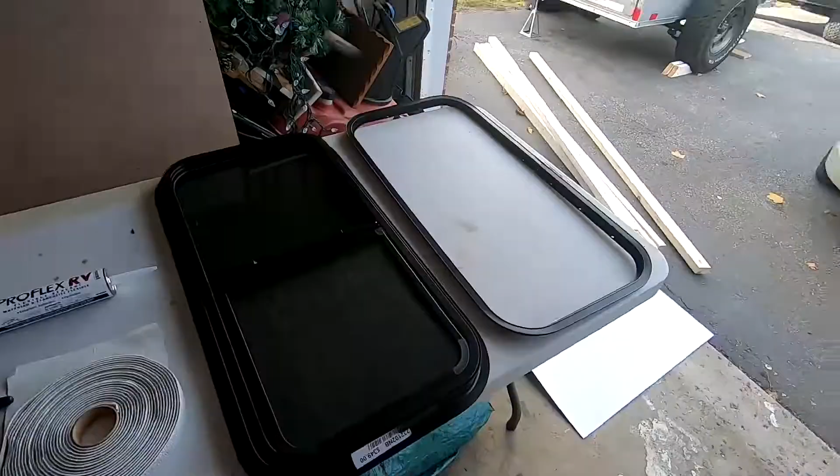Installing the RV window. This is a 30 by 15. All the trailer stores and parts warehouses and manufacturers around here, this is the standard size. I couldn't really find anything else. Ideally, I wanted to do 2 smaller windows, but I just decided to opt for the convenience of being able to pick up the window myself and not have to wait for shipping.

The way this works is similar to the roof vent. We're gonna have to drill a hole into the wall, mark it out and everything. I'm gonna measure off of the interior frame, and essentially what happens is that I'll have to get someone to hold the outside, and then I will be inside with the frame, line it up, and then sort of sandwich the 2 pieces together. I'm gonna be using some 2x3s as the frame. That should give me the right thickness and offset.

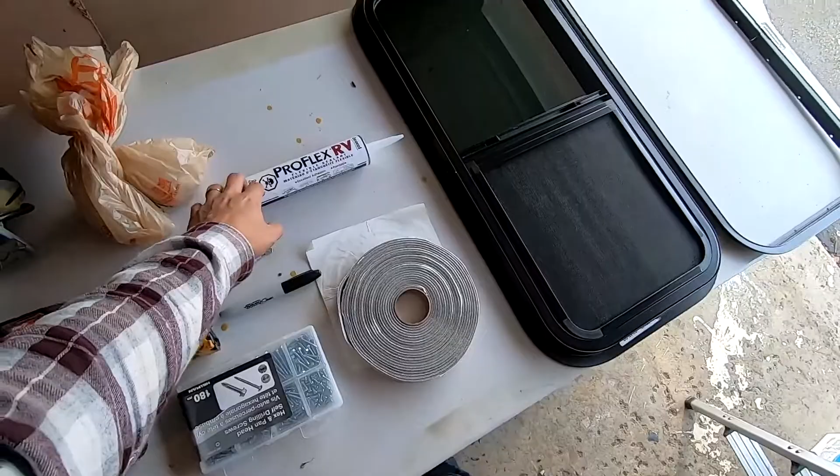Got some butyl tape, some clear RV sealant that I'll be using afterwards once it's all on the exterior perimeter. Some self-tappers, impact drill with 2 drill bits, and then my jigsaw. So the first thing I'm going to do is use some old Bristol board I had left over, and I'm just going to make a template using the interior trim, and I'm going to trace the outside edge of the trim, and then that way I'm going to be able to transfer it to the trailer and make sure that I'm cutting the right hole in the right location.

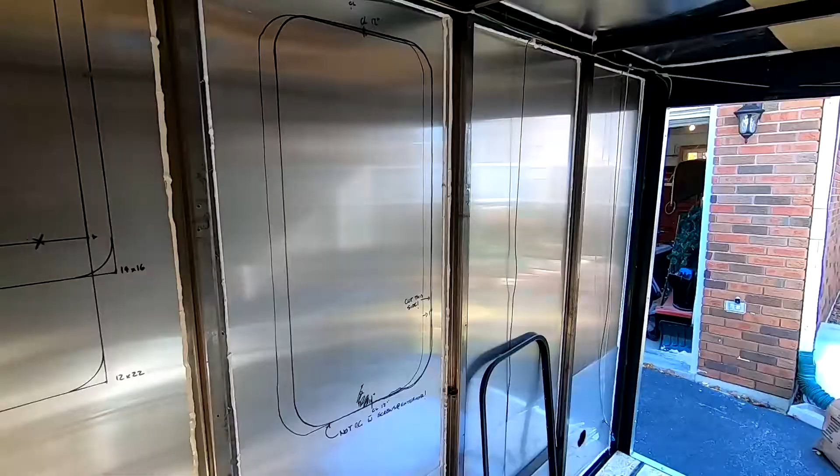Okay, so I've been having much debates with windows. As you can see, I've been sketching a lot of them out. This was the original window size I wanted to get, but unfortunately I wasn't able to find any, so I'm going with a larger vertical window.

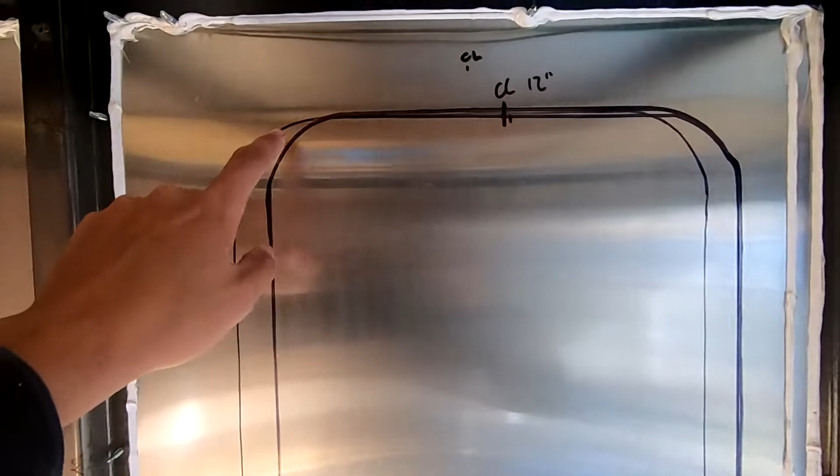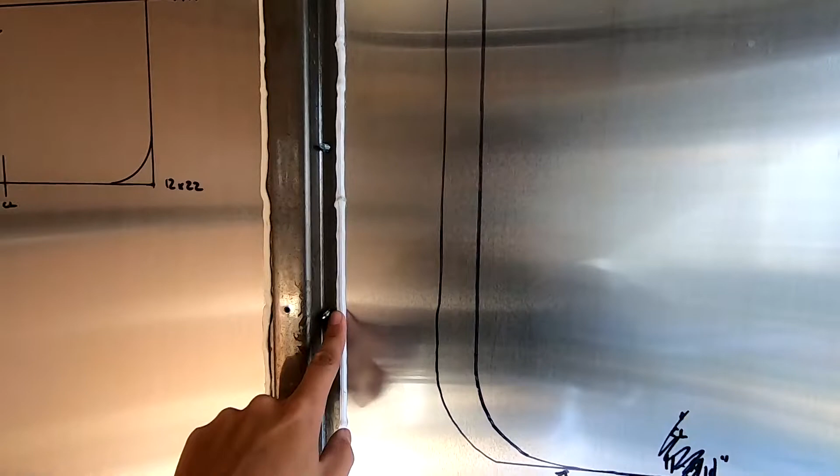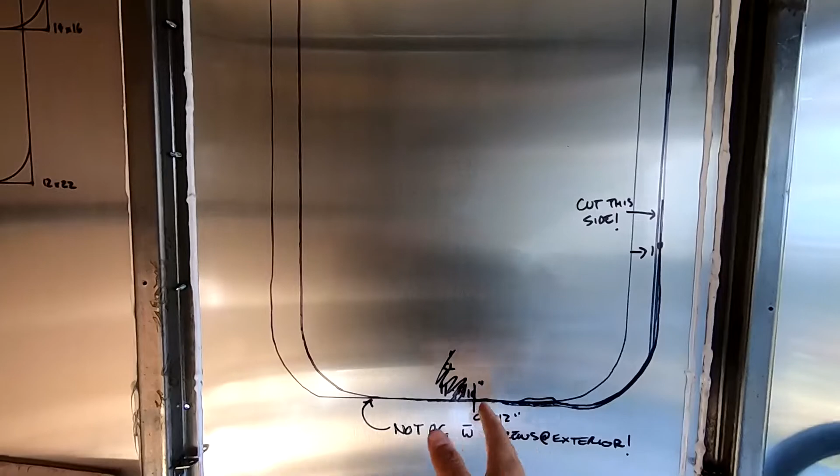Okay, so originally I traced out the center line of the window between the 2 studs, and I was just about to drill the holes, but then I kind of thought, okay, the screws for the panels on the exterior, you know, they got set here on the side of the stud, and then again on the outside edge of the stud. So even though it might be centered between the studs here, it wouldn't be centered with the screw heads on the exterior. So I moved it an inch towards the right here.

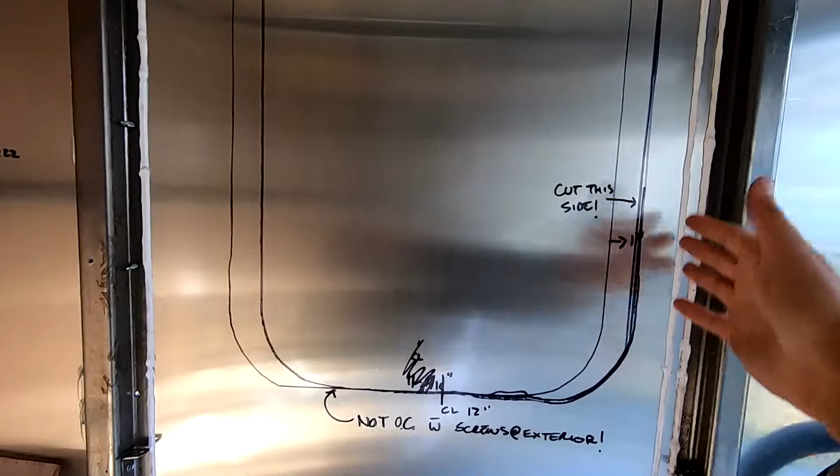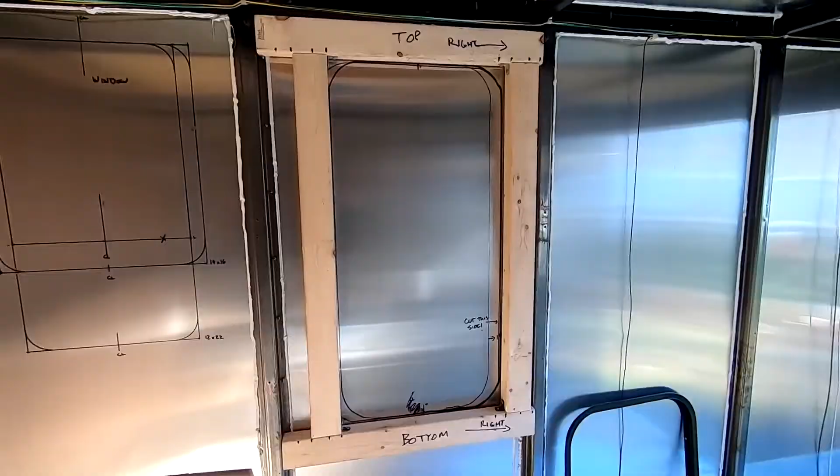And so I don't really care if it's not centered on the interior side, because this is going to be all covered. But on the outside, I think it would look a little odd if the window wasn't centered between the screws. So this is the frame I built for the window. It's just out of 2x3s, and I installed some brackets on each side here on the face of the studs to hopefully support, and then I'll PL before I install the frame.

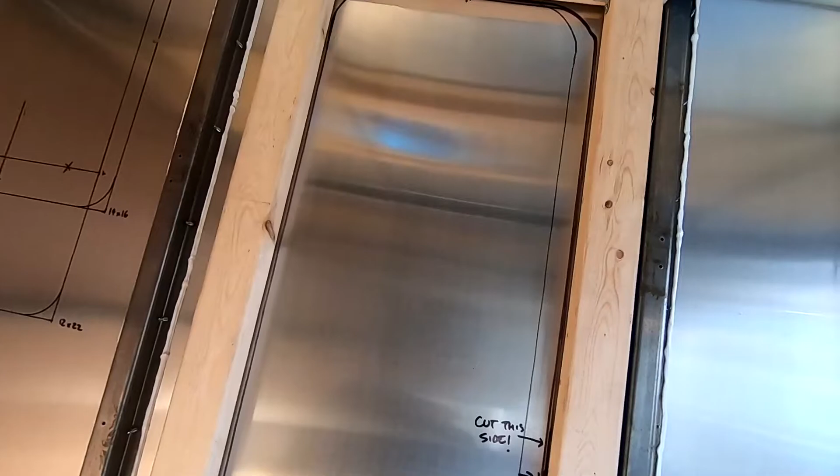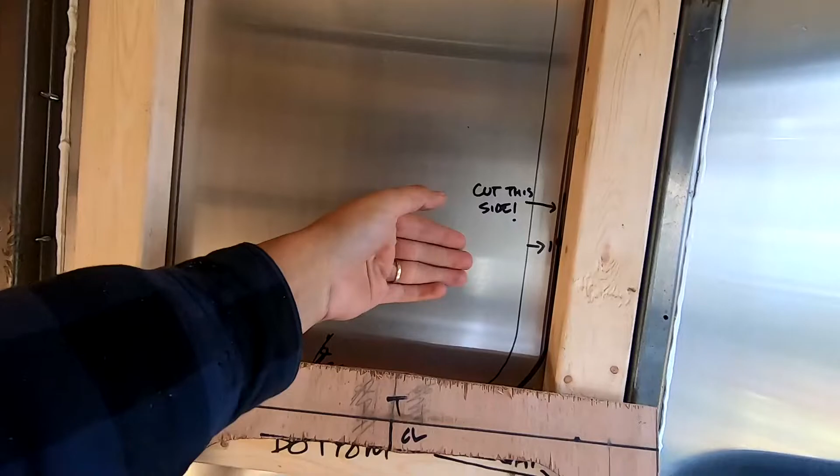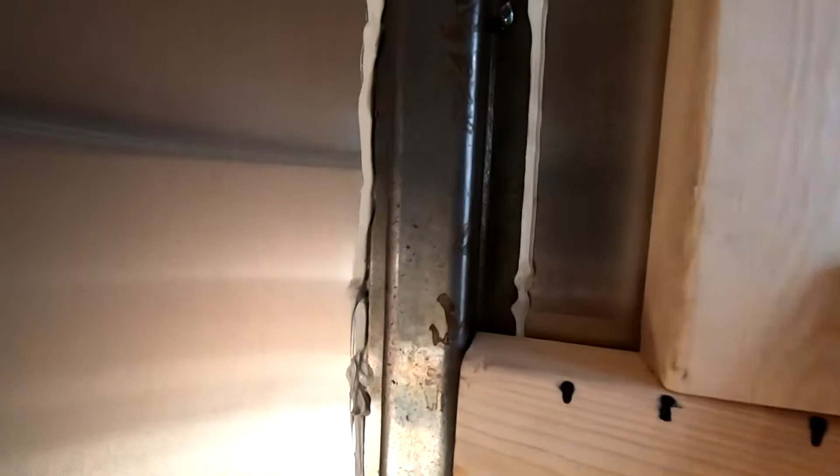I also made a template spacer to help with the spacing for the window so that I get the proper thickness and the window's actually able to sandwich in between the outside face and the inside face, and I get a nice seal. There's a bit of a gap here, and I don't want the outside skin to buckle or oil can, I guess. The reason for that is that top hat studs obviously have a thickness to them, which creates a gap between the outside skin and the inside face here. This will go on the inside face between the aluminum panel and the window frame. No turning back now.

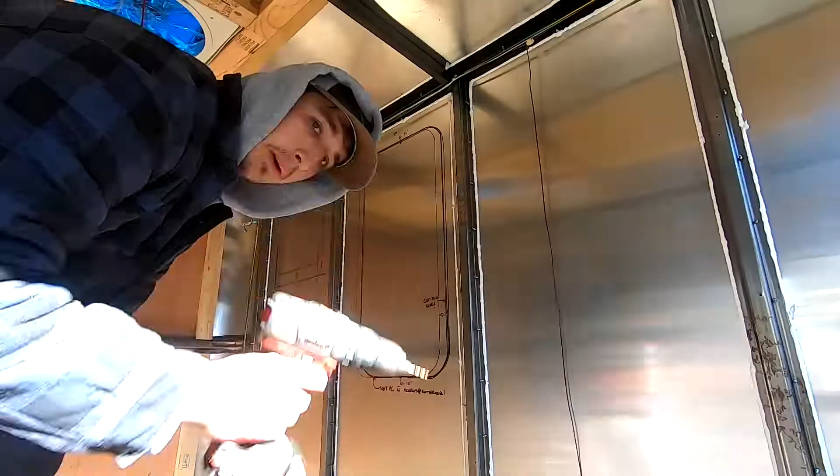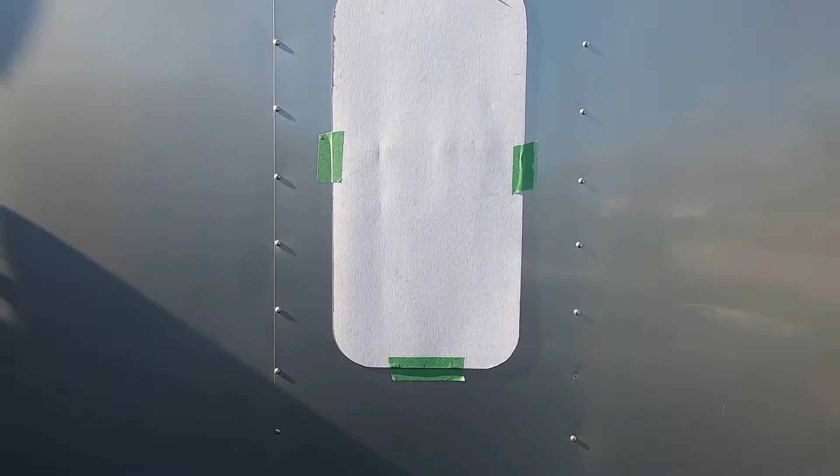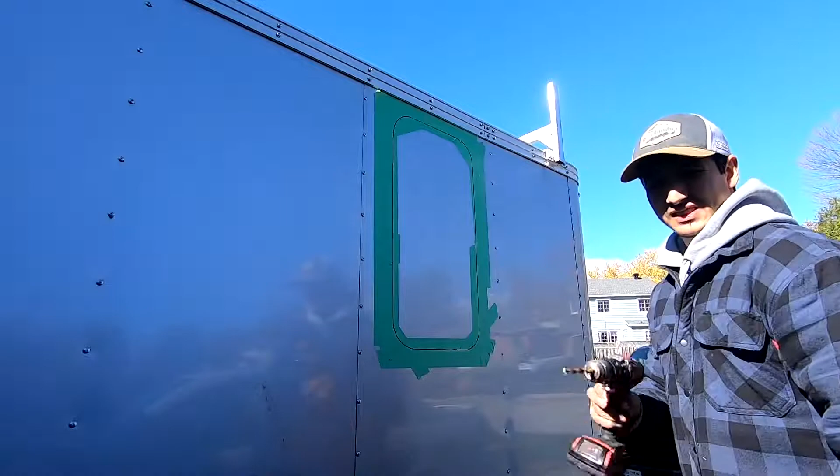Okay, so I just drilled my 2 pilot holes on my center line, top and bottom. Going around to the outside. I transferred the template on the outside. I had the center lines marked, top and bottom. Line those up, and I think it looks pretty good. It looks centered. Gotta look at it from afar, right? See if you're on the right track. I think it looks pretty good. Drill my hole for my jigsaw bit.

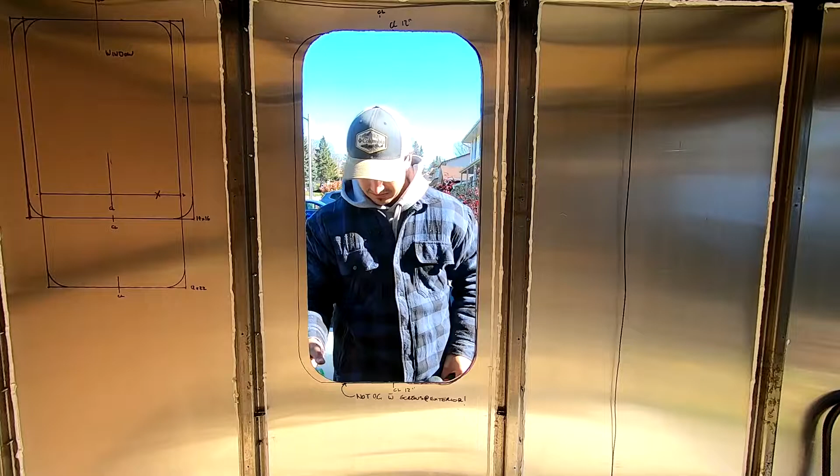Hello. We have a hole in the trailer. Another one. So now, use my handy dandy file and get rid of the burrs so that there's no sharp edges, because we don't want it to damage any waterproofing.

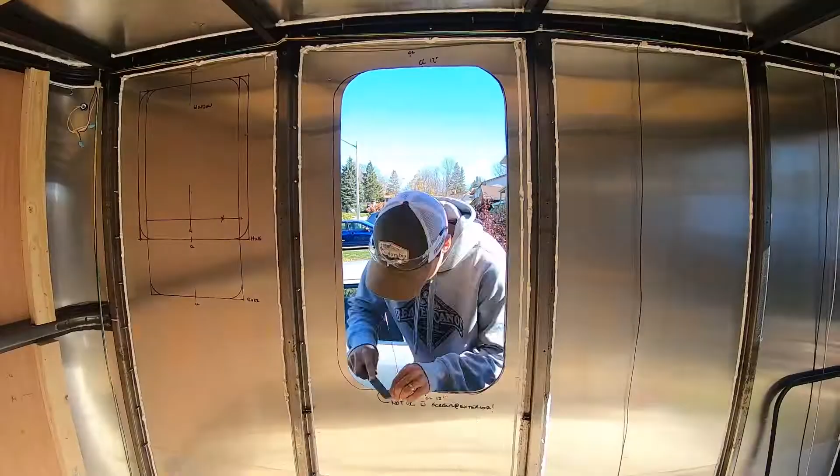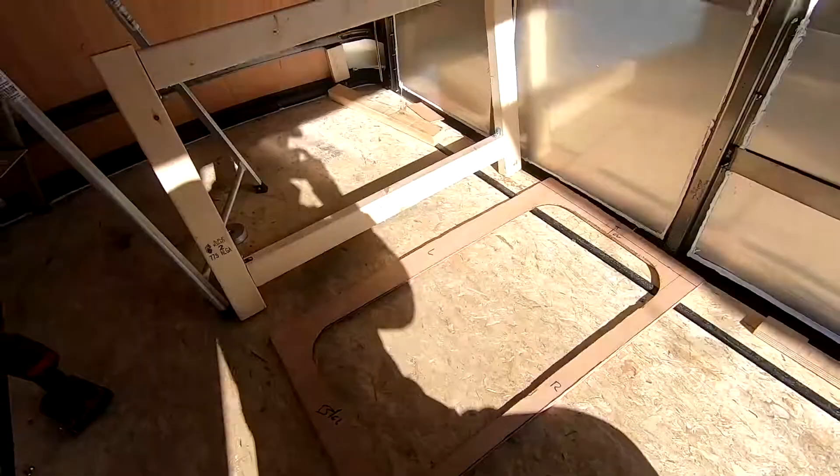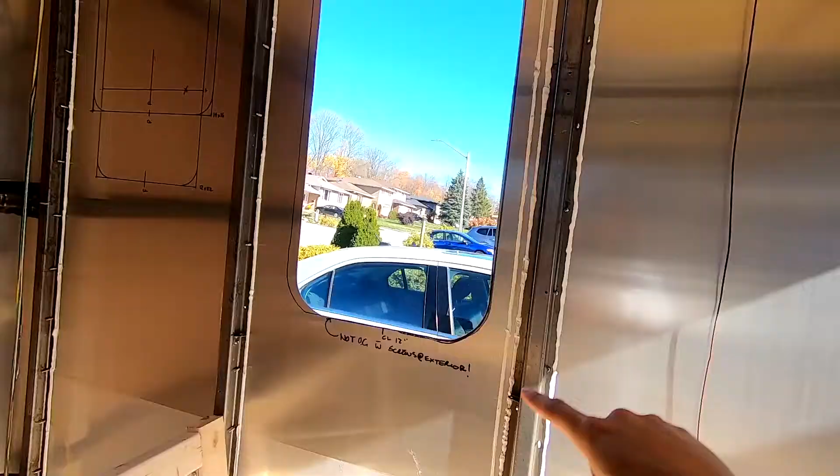Just about to install my spacer plate to my window frame, and I'm going to use some good old PL, install the frame, screw it into the brackets that I put in, PL on the inside face of that as well, and then I'm going to clamp it, let it settle, and then once I go to install the window, it'll kind of all sandwich together.

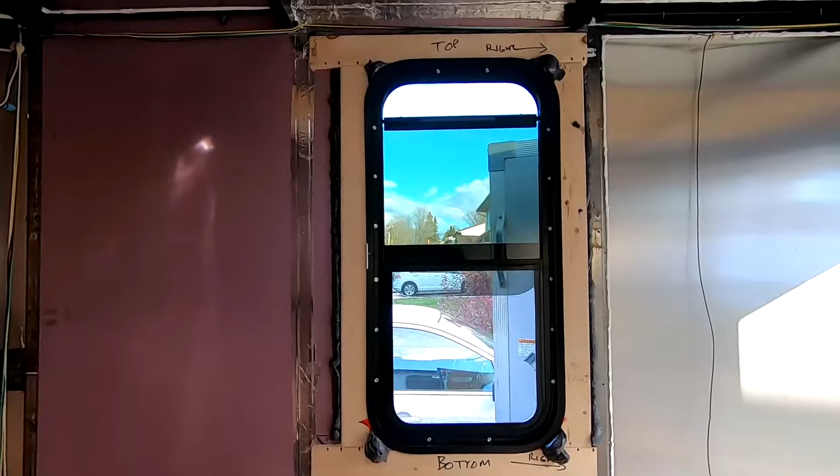So it's been a little bit. Battery on the GoPro died and I didn't feel like charging it before putting the window in, so I apologize for that. Essentially the window is installed now. 1-inch self-tapper screws sandwich the window, the outside plate and the inside plate together.

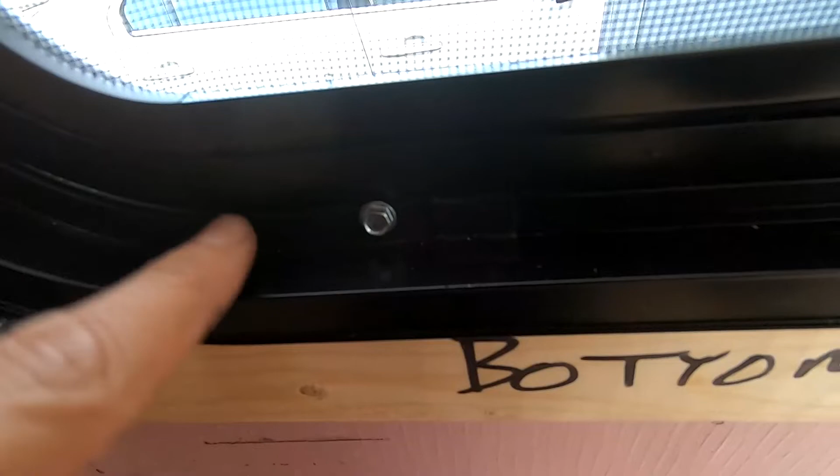You can see my little boo-boo there. So what happened is that the lower lip of where the self-tapper goes into on the window broke off, because I had the screw in sideways. So what I did is I drilled another hole and then installed a new screw. I put a little piece of electrical tape to sort of hide that hole.

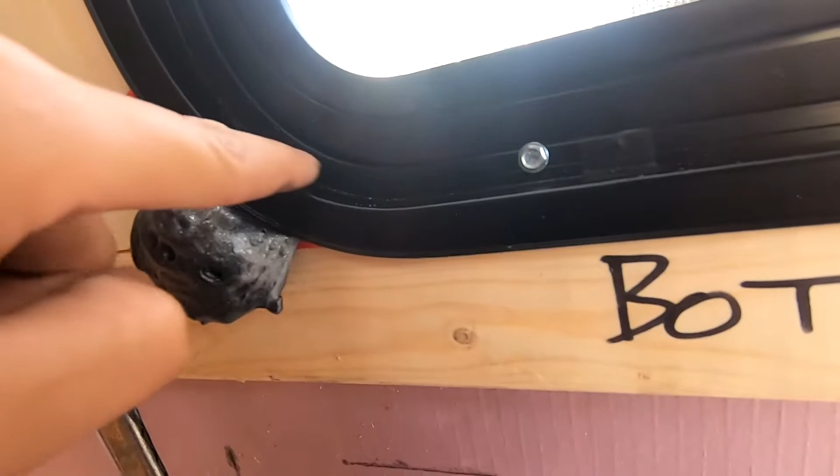Now the only complaint I have about this window is that there's no screw hole here for a tapper, and what happens is that there's a little gap in all the corners, and so I was a little worried when I was putting the spray foam that it would start seeping through. So what I did is I added a piece of cardboard that was left over from a case of beer, and I lined it with the dark side up so that the spray foam wouldn't come through, and with that dark color inside you don't really see the foam itself.